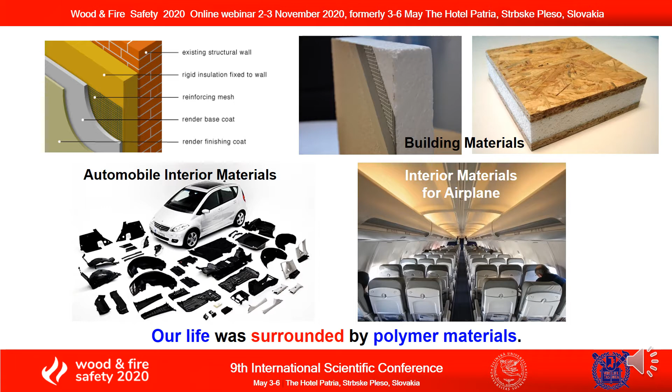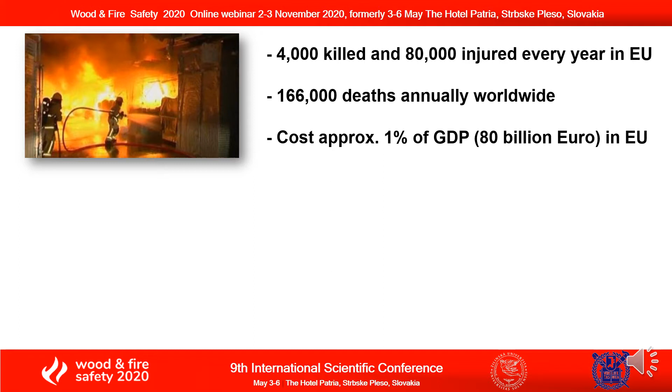4,000 killed and 80,000 injured every year in the EU, and also so many people die annually worldwide. It also costs on average 1% of GDP in the EU. Halogenated fire retardants release gases which are toxic, corrosive, and damage the ozone layer. Still much to do with regard to surface spread of flame and the generation of smoke, particularly for the transport sector.

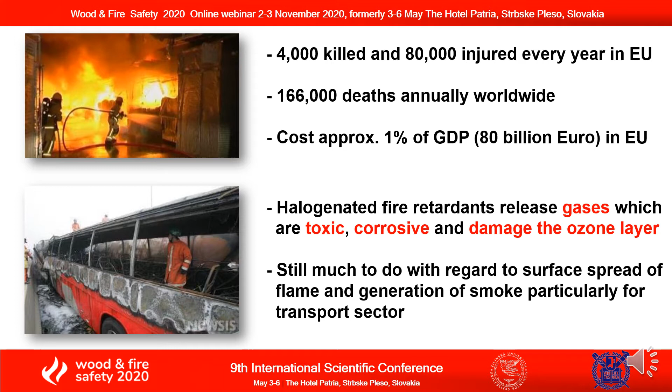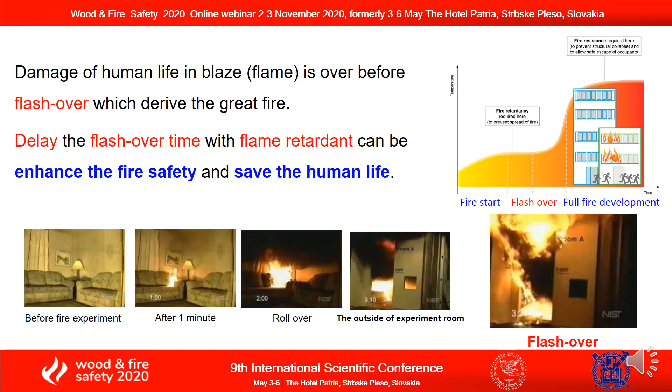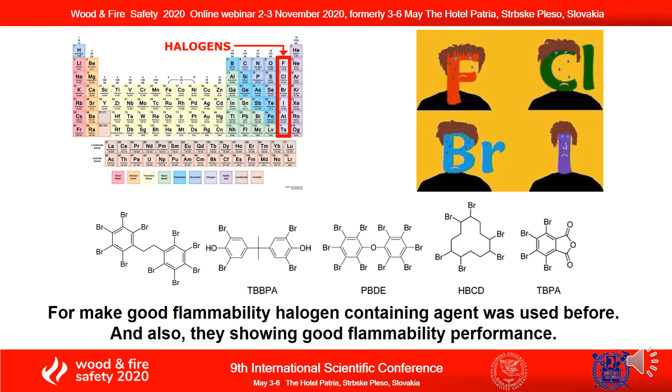As you know, damage of human life in a fire is over before flashover, which drives the great fire. Delayed flashover time with flame retardants can enhance the fire safety and save human life. To make good flammability, halogen-containing agents were used before, and they showed good flammability performance. WHO and US EPA recommend a limit on the exposure amount for the risk assessments of toxic components. That is the reason why we started on halogen-free flame retardants.

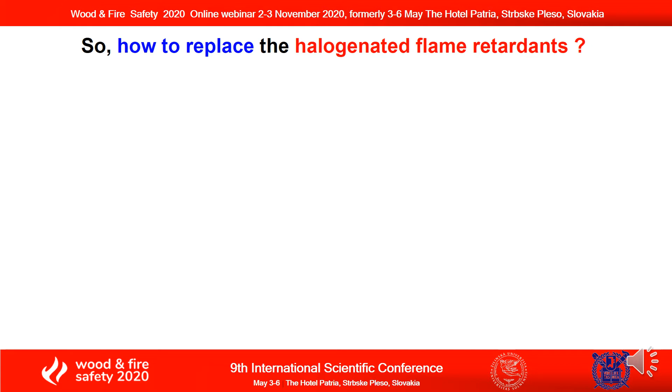So, how to replace the halogenated flame retardants? I can explain 3 types. First is metal hydroxide powder. Second is phosphorus-based intumescent flame retardants. Finally, the third is nanomaterials, for example, nanoclay and carbon nanoparticles. Many flame retardant systems were designed and investigated. So I will explain in more detail.

First, metal hydroxide. It usually requires higher loading in polymers of up to more than 60%, because the flame retardant mechanism is based on the release of water. It is stable up to a temperature of around 300 degrees. Second is phosphorus-based intumescent flame retardant. When it is introduced into the polymer materials, their mechanical properties will sharply decrease. Finally, third is carbon-based materials. It must be treated with strong acid like sulfuric or nitric acid to get the expandable materials, which are mixable with organic polymer.

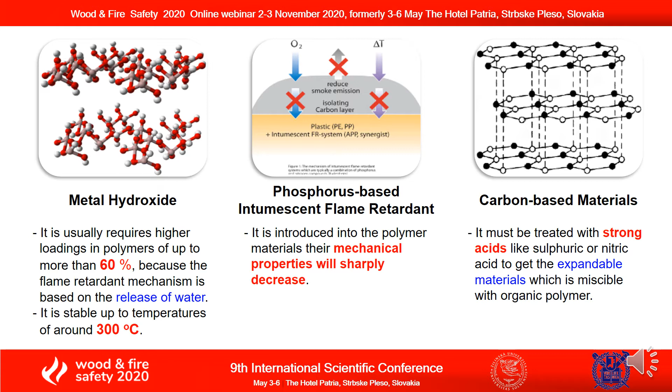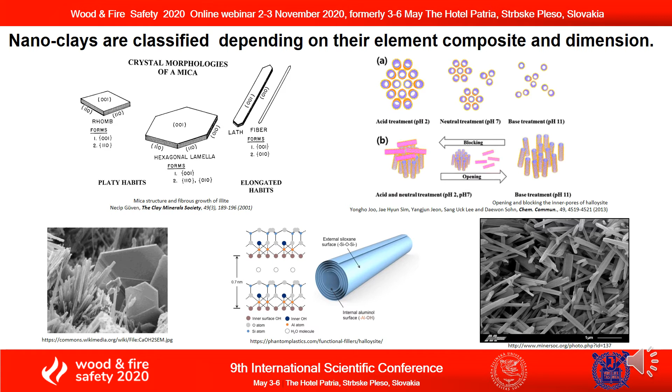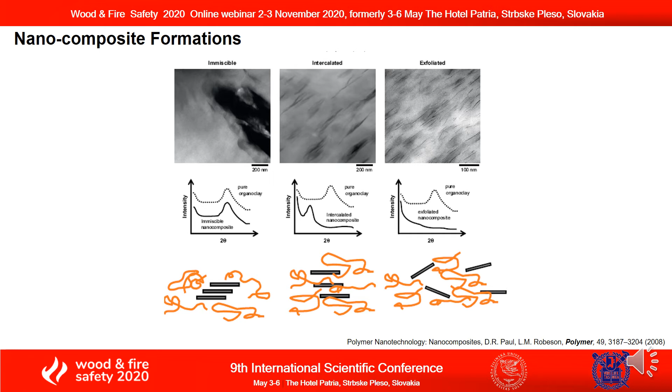Second part is nanomaterials. Nanoclays are classified depending on their element composition and dimension. That is one example of nanoclay, the formation and the size. So many people are working on nanoclays. In nano-composite formation, sometimes it is an immiscible system, sometimes intercalated, sometimes exfoliated. For each conformation, the X-ray scattering intensity is so different, so that is important. When nanoclay is used in a composite as a flame retardant additive, dispersion is a very important factor to accomplish the flame retardant property.

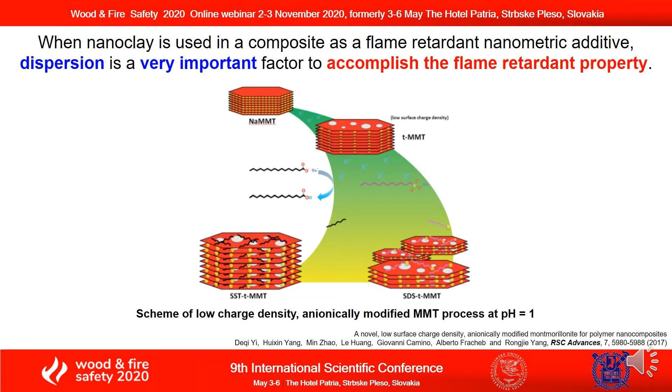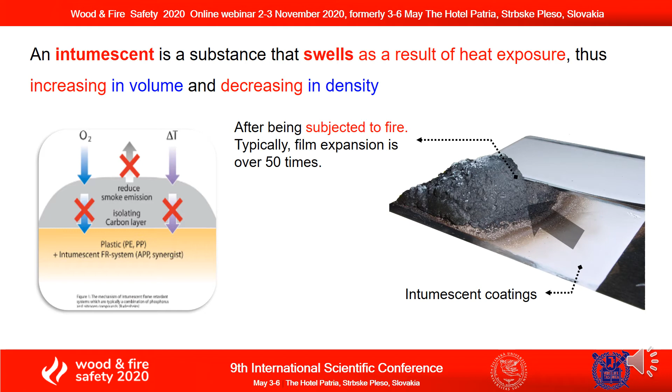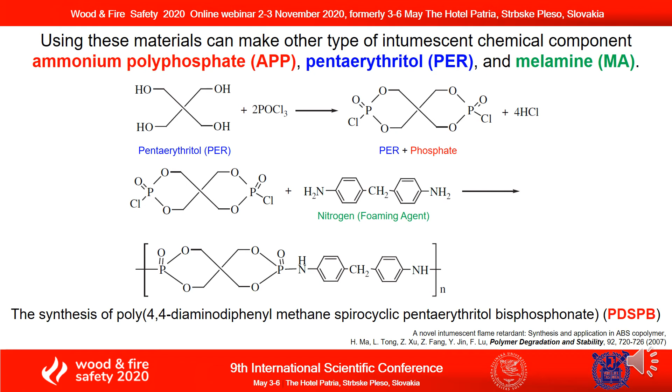And the third part, intumescent agent. An intumescent is a substance that swells as a result of heat exposure, thus increasing in volume and decreasing in density. As you can see in the figure, after being subjected to fire, typically the expansion is over 50 times. Using these materials can make other types of intumescent chemical components, for example, 3 types: APP, PER, MA. So we synthesized poly(4,4-diaminodiphenyl methane spirocyclic pentaerythritol bisphosphonate. We call it PDSPB.

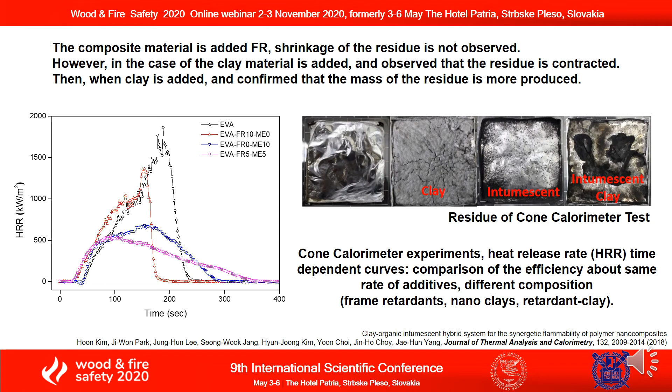So you can easily understand using the HRR peak. Cone calorimeter experiments, heat release rate, we call it HRR, time-dependent curves, comparing the efficiency with the same rate of additives in different compositions: flame retardants, nanoclays, retardant clays. So HRR decreases by adding clay. So we can control the nanoclay so that HRR is decreased. Observing the residue, in the case where clay is added, I have observed that the residue is contracted. Then, when clay is added, we have confirmed that more mass of residue is produced.

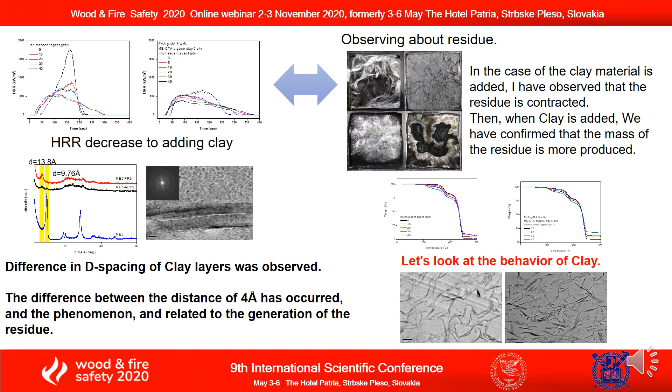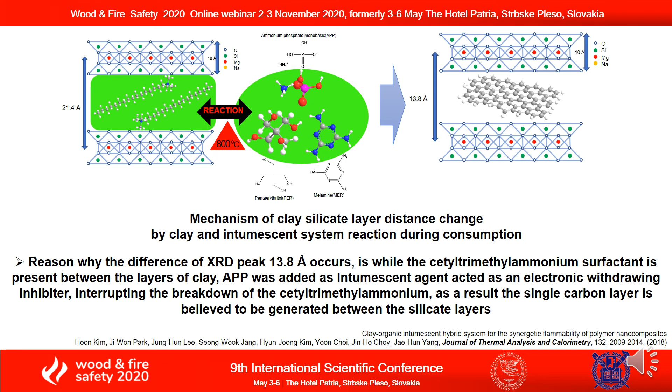The mechanism of clay silicate layer distance change by clay and the intumescent system reaction during combustion. The reason why the difference in the XRD peak at 13.8 angstrom occurs is that cetyltrimethylammonium surfactant is present between the layers of clay. APP added as intumescent agent acts as an electron-withdrawing inhibitor, interrupting the breakdown of the cetyltrimethylammonium. As a result, a single carbon layer is believed to be generated between the silicate layers. So you can see in the figure 21.4 angstrom between the clay. After reaction at the high temperature of 800 degrees, it changes into 13.8. So the clay layers contracted toward each other.

Conclusion: flammability has many complicated reasons, including chemical properties and the physical properties originating from the morphology, and when additives are used together, they can have a synergetic outcome. So this is the main issue entering a new age, and we can convert it into core compositions.